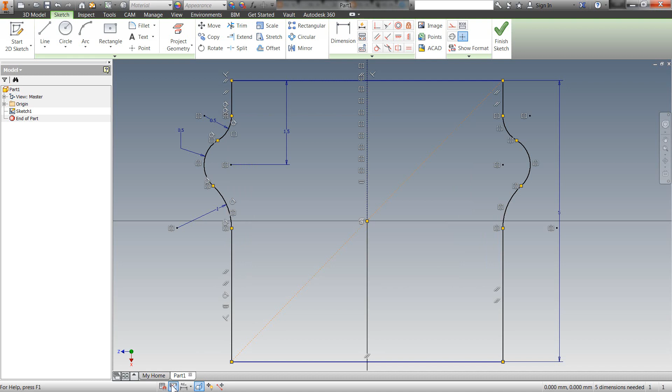But the one thing I like to show is this setting down here in the bottom. And that will turn your constraints on and off in the screen. You can also do that with F8 to turn it on and F9 to turn it off. But it's just kind of nice when you're working inside of Inventor that you can turn these on or off depending on if things get a little crowded.

Now, in a previous quick tip, I showed how you could customize the look of your part. And one of the things I did was change the background color. Now you will see here that I got this presentation background. And one of the things that is pretty neat about Inventor is that depending on what background you have, that will show the sketches differently, because Inventor gives you some great feedback in this sketching environment, depending on constraining our sketches. We're removing these degrees of freedom, right, to make the sketches flexible or tie them down depending on what we want. So depending on what background color you have, that actually determines how that displays.

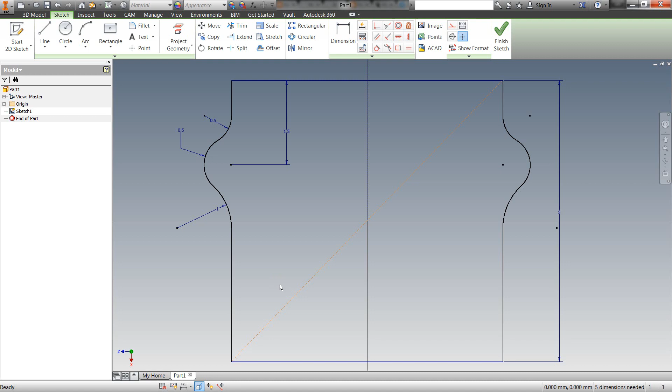So let me show you where you can change that. If you're brand new, you're probably using the Winter Night background, but maybe you have taken over somebody else's seat of Inventor, and they have maybe customized things. So you go up to Tools, and in here you can go into Application Options. In here you have the color, and there's some different options in here. Play around with it. The Winter Night is the default, and if you're a new user, that's probably the one I would recommend you to use.

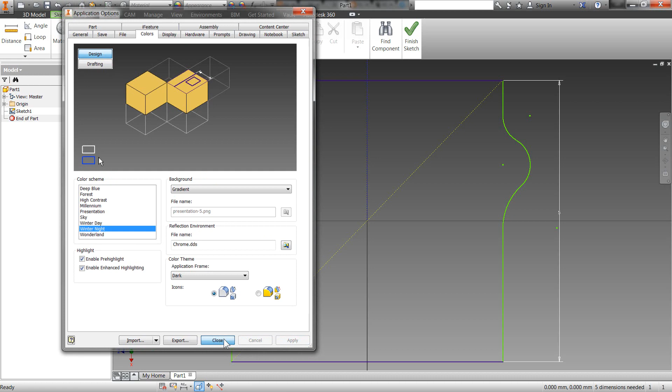You will see how it pops up with colors here. So the neon green, hello 80s theme here, shows you what still needs to be constrained, and the dark blue shows you what has all been tied down. So it's pretty cool that the software gives you this feedback with the background color. You will see here that if I delete this 5mm dimension, then everything turns green, and if I apply it again, you will see that now it turns blue. So that will give you that feedback.

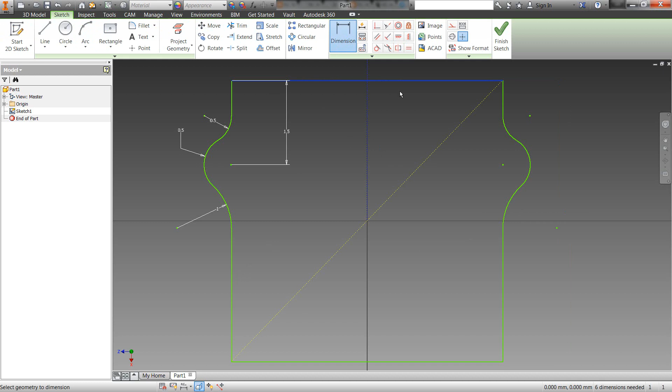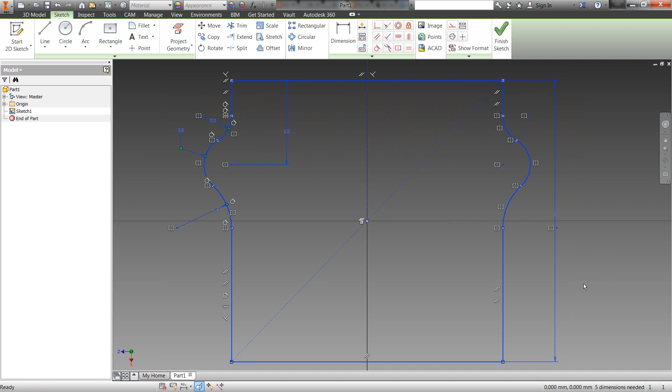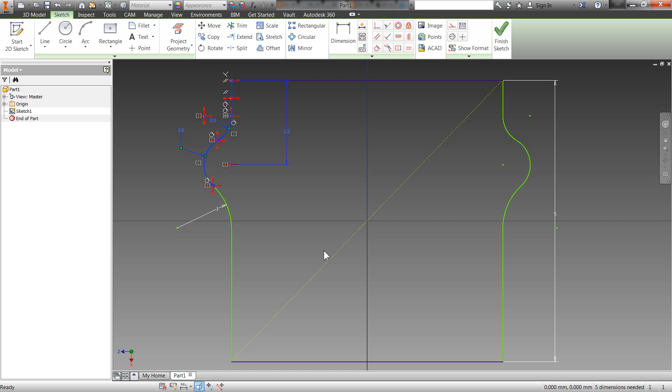Good stuff to know. Another trick that is pretty neat about Inventor: when you are putting your constraints and your dimensions on, like I said before, we are getting rid of the degrees of freedom. If you highlight your sketch and you right click in here, there's an option called Display Degrees of Freedom. Now that one is pretty neat. When you turn that on, it will actually show you in the sketch where things can still move. And you can of course right click and turn it off again. Now what is neat is you can also just window select certain portions and turn this function on and off, because sometimes you want to just concentrate on one certain area.

So neat things. Now while I'm in my right click, I definitely have to show you the Sketch Doctor. This is an option that I think many people miss out on. What the Sketch Doctor is great at is that if you have a sketch and you maybe have an issue extruding it out, something is just not right, many times it's your sketch that has an issue. So you can right click, select Sketch Doctor, and it will take you through this menu where you can diagnose what is happening with your sketch.

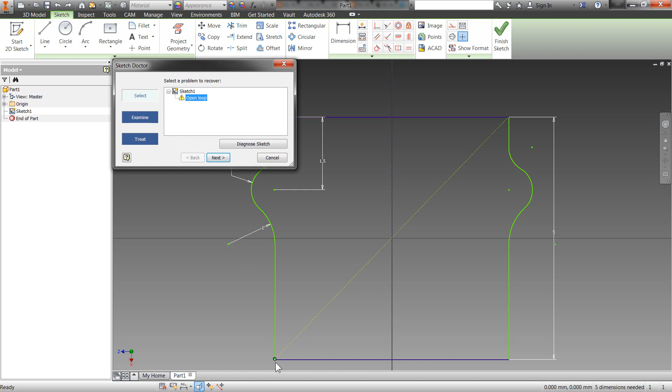And you will see here that down in the lower left corner, I have a little highlight, and somebody must have created a little sketch geometry we don't need. And you have some different options in here, so you can click, and then you can go in and edit it, and I can just get rid of this sketch entity because I don't really need it.

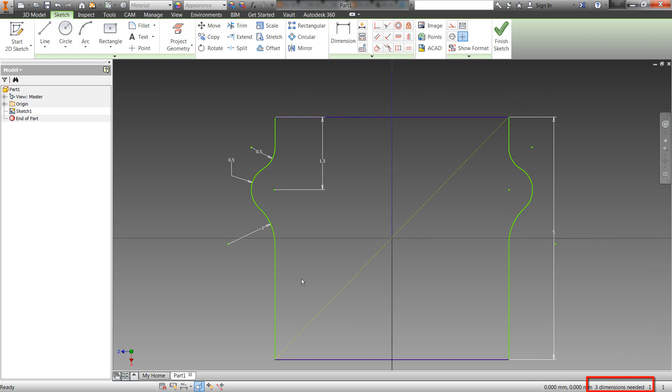Now, another thing that many people miss, sitting right down here in the lower right: Inventor actually shows you the dimensions still needed to fully define your sketch. This is an option that is really cool. So you will see here that if I apply another dimension, the count actually goes down. So Inventor is giving you this kind of feedback.

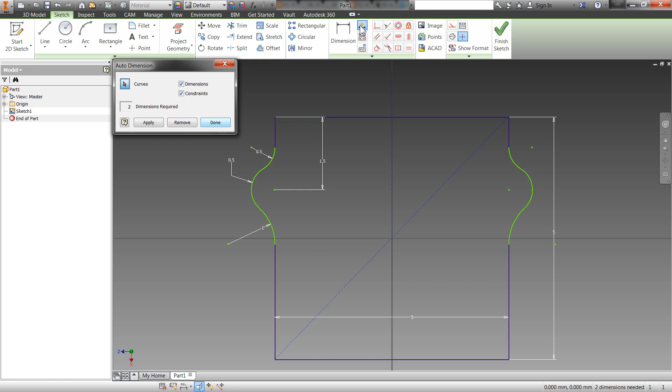Now, the last function I want to show you in here is this function up here called Automatic Dimensions and Constraints. So if you are at the point where you can't really figure out what other dimensions or constraints you need in your sketch, maybe you try to drag the corners around, then you can hit this Automatic Dimensions and Constraints option, and it will actually apply the dimensions and constraints for you. So you will see here that I get a radius that I was missing here.

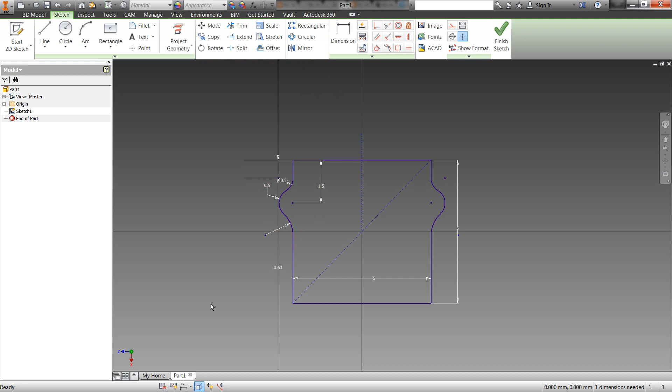Now you will also see that I have an extra dimension up here that you might question where that is coming from. That's just another tip. I actually have a construction line right here in the center, and that's what Inventor is referencing. The reason that I have that construction line is because when I modeled this outer bump here, I used the mirror command up on the sketch menu. Don't forget about these great options up here. You can be lazy when you're working in CAD. So this is a little trick so that you don't have to draw everything twice. You can use something like the mirror function.

Hey, I hope that you enjoyed these quick tips if you're new to sketching inside of Inventor.